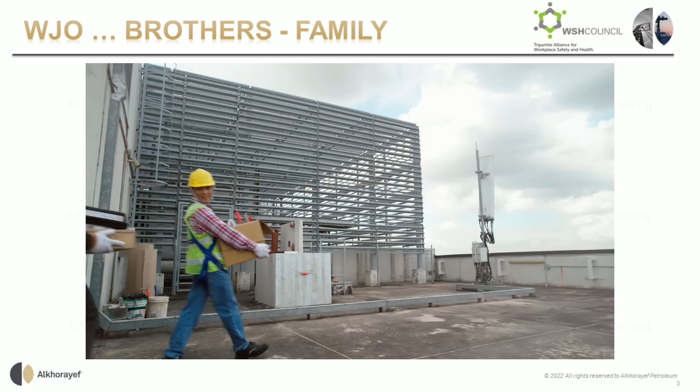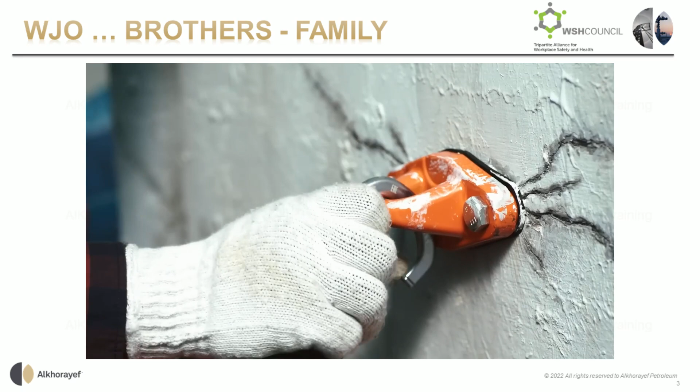Hey, wait. Must stay safe. Okay, thank you, Arun. Arun, look, go quick, I think not safe. Must report. Arun, everything ready? Can start. Okay, start work. Okay, done. Yong Wei, give me one tape. Arun, be careful. Where's your way? What happened? What happened to you?

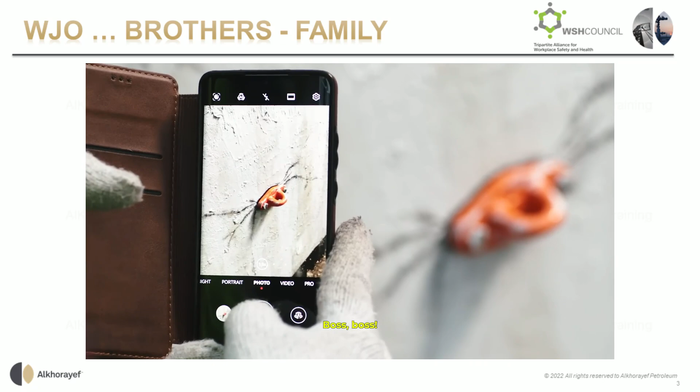Sorry, sorry. Arun, look, go quick, I think not safe. Must report. You're right, let's report. Boss, want to report a problem, sir? This one is not safe.

Here in Wafra, we all come from different backgrounds and cultures. However, all of us have one thing in common: we all left our homes and families to come and work in this place. We spend half, if not more, of our day working with each other. We are a family, brothers, but not in the traditional sense. Looking out for each other's back and taking care of each other is what makes us brothers.

Please make sure to always work safe and never cut corners. Please make sure to practice your stop work authority anytime you feel the need to do so. Never, under any circumstances, will the management or the supervisor blame you for reporting any unsafe act or condition. Always be cautious, always be safe.

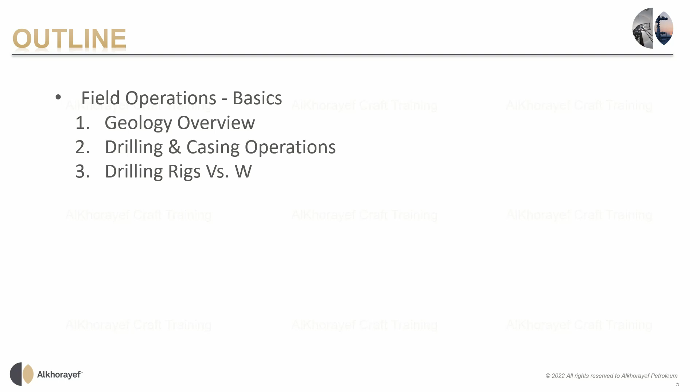Now let's start by going through the outline of this video. First, we will have a brief look about geology: what is it and why is it important? Second, we will look at drilling and casing operations. Third, we will look at the differences between drilling and workover onshore rigs. Fourth, we will have a brief look at the API standard, what it represents and why it is important. Lastly, we will go through the APC ESP standard operating procedure.

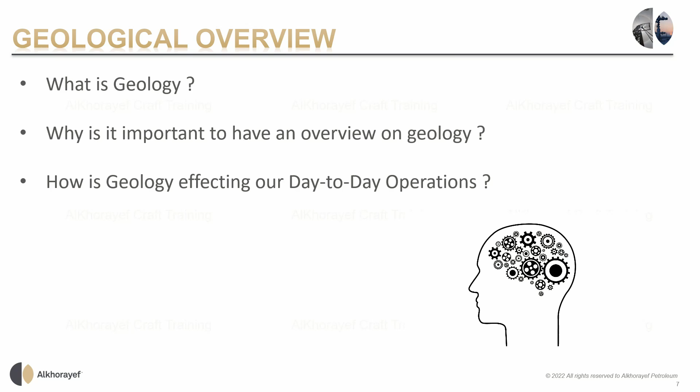In summary, geology is not just an academic subject. It is a practical tool that underpins our work in the oil and gas industry. By appreciating and applying geological knowledge, we can better manage the challenges and opportunities that come with each unique field.

However, beneath this challenging climate lies a blessing from God: reservoirs of hydrocarbons. These hydrocarbons, primarily oil and natural gas, are crucial for the development and progress of mankind. They power industries, fuel transportation, and play a vital role in the global economy.

Now let's talk briefly about hydrocarbons before we dive deeper into our subject. What are hydrocarbons? Hydrocarbons are organic compounds that contain only carbon and hydrogen atoms. They are the main components of fossil fuels such as petroleum, natural gas, and coal.

Hydrocarbons are classified into different types based on their chemical structure: alkanes or paraffins, saturated hydrocarbons with single bonds between carbon atoms, for example methane and ethane; alkenes or olefins, unsaturated hydrocarbons with one or more double bonds, for example ethylene and propylene; alkynes, unsaturated hydrocarbons with one or more triple bonds, for example acetylene; and aromatics, hydrocarbons containing one or more aromatic rings, for example benzene and toluene.

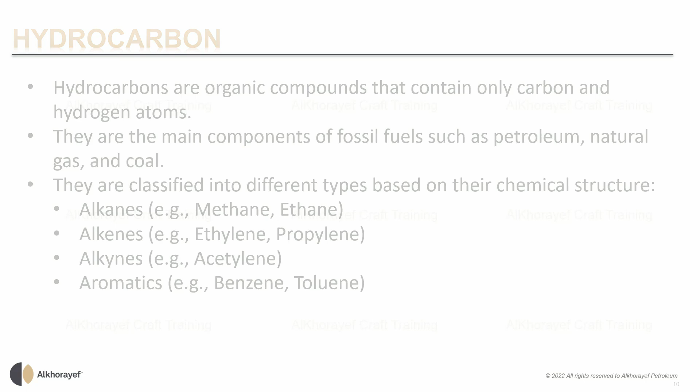Hydrocarbons are essential for modern society, providing a primary source of energy and serving as raw materials for a wide range of industrial products. Let us continue with our topic.

Understanding these properties is crucial for our operations. For instance, pressure is the force exerted by the weight of overlying rock layers and fluids within the pores. Porosity is the measure of void spaces in a material, which affects how much fluid a rock can hold. Permeability is the ability of a rock to transmit fluids through its pore spaces.

These properties significantly impact our extraction techniques and equipment choices. Recognizing the unique characteristics of each layer helps us optimize our operations and ensure the efficiency and safety of our activities. Now that we understand the properties of the various geological layers, let's delve into the specific types of rocks that play crucial roles in hydrocarbon formation and trapping.

By examining source rocks and cap rocks, we can better appreciate how oil and gas are generated and preserved in the subsurface. Source rock: source rocks are the geological formations where hydrocarbons originate.

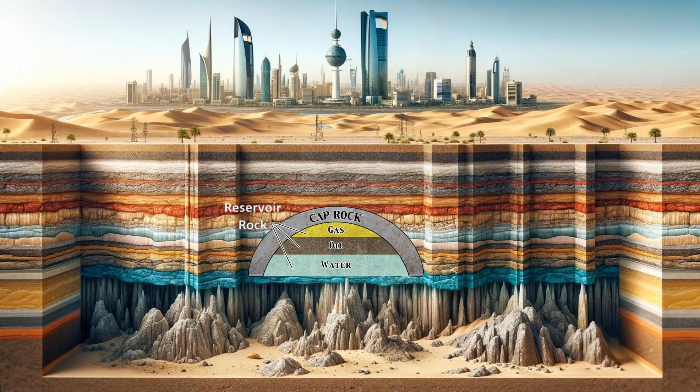Source rocks generate hydrocarbons, cap rocks trap them, and the resulting oil and gas are extracted to meet global energy demands. Each of these components must be carefully studied and managed to ensure successful and sustainable hydrocarbon production.

By examining this stratigraphic column, we can gain valuable insights into the geological history of the region, identify potential hydrocarbon reservoirs, and understand the structural features that influence fluid flow within these formations. This knowledge is crucial for effective exploration and production in the oil and gas industry, as it helps us make informed decisions about drilling locations, extraction techniques, and resource management.

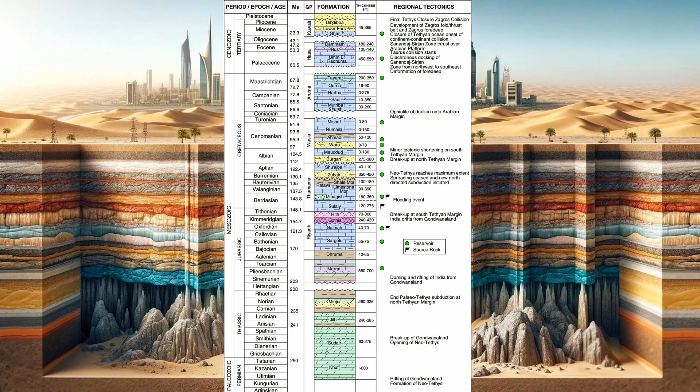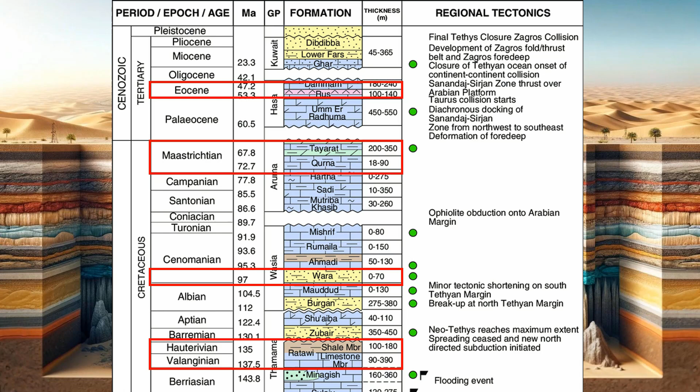Zooming in on Kuwait's stratigraphic column, we can see formations and reservoirs we are producing from here in our operations in Wafra, for example. We can see the Eocene Formation, mainly represented by letter S in our well operations. We can see the Maastrichtian Formation, represented by letter M. We can see the Wara Formation, represented by letter W. We can see the Ratawi Formation, represented by letter R.

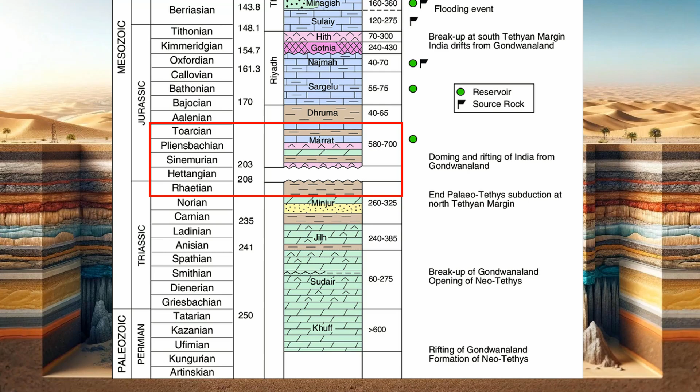These formations are integral to our production activities, and understanding their characteristics helps us optimize our extraction techniques and manage our resources efficiently. Furthermore, a question may be raised: how did geologists and scientists know about this stratigraphy? How did they determine the formation's petrophysical properties and mineralogy? All of this is done by taking a coring sample.

A coring sample, also known simply as a core, is a cylindrical piece of rock extracted from the subsurface during drilling operations. This sample is obtained using a specialized tool called a coring bit, which is attached to the drill string. The core is typically taken from the reservoir rock or other geological formations of interest.

This core sample is used to understand reservoir characterization, petrophysical properties, mineralogy, geological and structural analysis, stratigraphy, structural features, fluid analysis, hydrocarbon content, fluid properties, economic evaluation, resource estimation, and more.

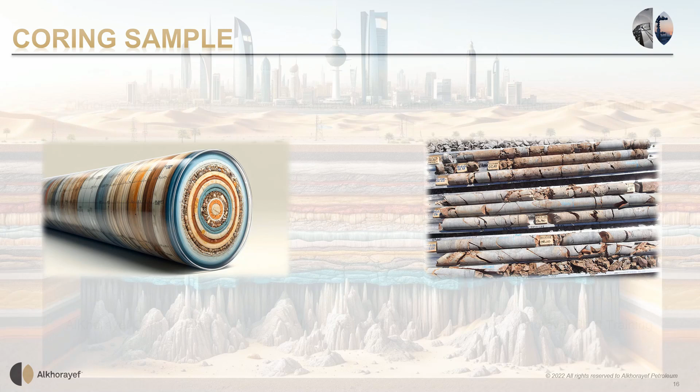By providing a direct and tangible sample of the subsurface rock formations, coring samples play a vital role in the exploration, evaluation, and production of oil and gas resources. They enable more precise and informed decision-making, leading to better management and optimization of hydrocarbon reservoirs.

Now let us move on and explore the drilling operations.

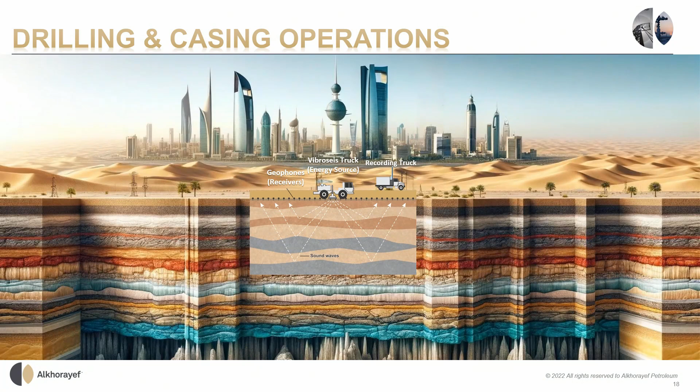After a seismic reflection survey, which is a specialized job that uses non-invasive geophysical techniques, geoscientists can image geological features and structures throughout the whole thickness of the crust. In a simple form, this survey provides an indication of whether hydrocarbons might be present in a particular location.

After the seismic data is interpreted, the reservoir engineer, along with the geologist, evaluates the potential for hydrocarbon presence in the surveyed area. They analyze the seismic reflections to identify possible reservoirs, determine their extent, and assess the likelihood of hydrocarbon accumulation. Based on the depth of the reservoir, its location, geometrical complexities, and the depth that needs to be drilled, a drilling program is created by the drilling engineer.

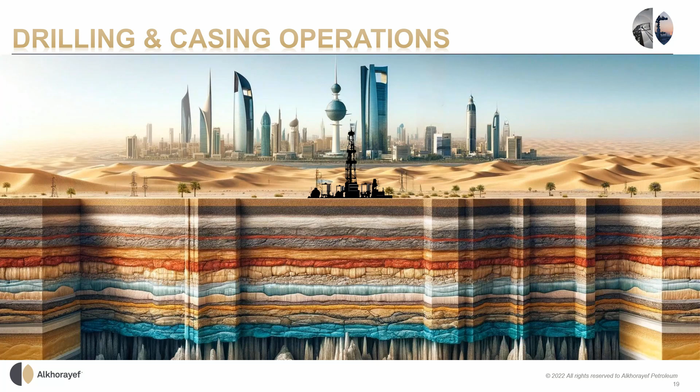A drilling rig then moves to the location and begins the drilling operation. While well drilling might seem as simple as removing dirt from the ground until reaching the desired depth, it is in reality more about constructing a well rather than merely drilling a hole. This involves careful planning, casing, cementing, and installing various equipment to ensure the well's integrity, safety, and efficiency.

After drilling the first section, a casing is installed and cemented to the annulus of the well to isolate the formation from the next section.

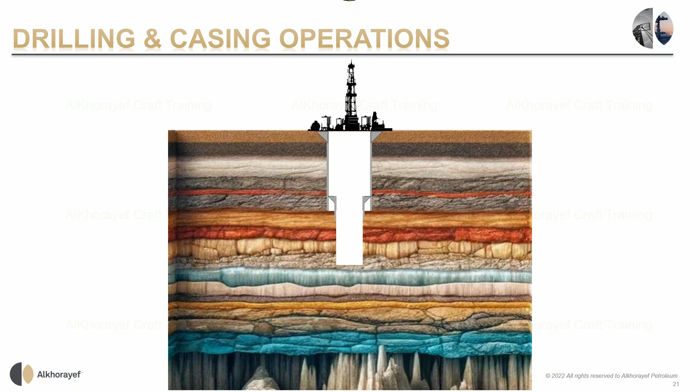The process continues to drill to the next predetermined casing point, which is called intermediate casing. This is generally done to isolate unstable hole sections, isolate under-pressured zones to prevent loss of circulation, isolate over-pressured zones to prevent well kick, and isolate multiple production zones.

Continue the process to drill to the total depth, TD. Once the final intermediate casing string is run and cemented, the drilling process is continued until the well reaches the TD of the well. After that, the production casing or liner is run and cemented.

After running and cementing the production casing or liner, a perforation job is conducted on the production casing. Perforation involves running a perforation gun into the wellbore until it reaches the desired production depth. Once in position, the perforation gun is fired to create openings in the casing, allowing reservoir fluids to flow into the casing.

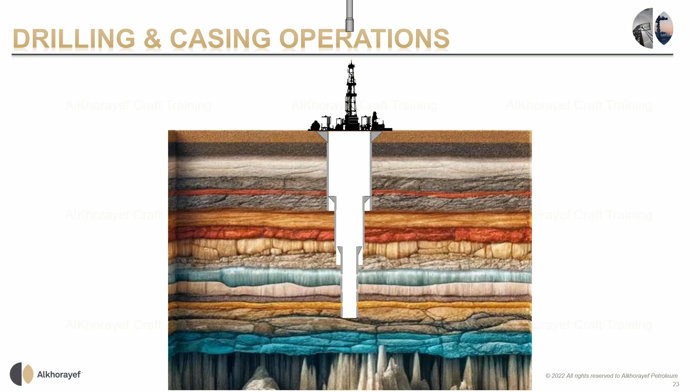After perforation, production tubing is installed in the well. Following this, a series of valves and equipment, known as a Christmas tree, is installed on top of the well. The Christmas tree controls the flow of formation fluids. In wells where the formation fluid flows naturally to the surface, this setup is referred to as a natural flow well.

However, if the flow of the fluid is not sufficient to reach the surface naturally, the well requires additional means to assist the fluid in reaching the surface. In the oil and gas industry, this process is known as artificial lift.

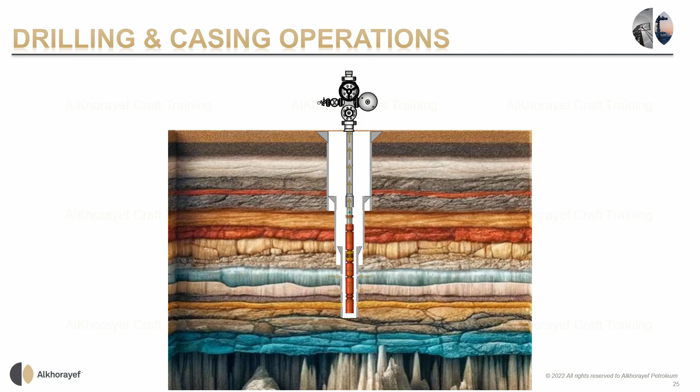One of the most widely used artificial lift methods is the electrical submersible pump, ESP. An ESP is a technology installed in the well to help increase the lift of the fluid, enabling it to reach the surface. The ESP system consists of a multi-stage centrifugal pump that is submerged in the wellbore. It is powered by an electric motor, which drives the pump to lift the fluid from the reservoir to the surface.

The key components of an ESP system include: the pump, a multi-stage centrifugal pump designed to handle large volumes of fluid; the motor, an electric motor that drives the pump, typically located below the pump in the well; the seal section, which protects the motor from well fluids and provides a pressure equalization system; the power cable, which transmits electrical power from the surface to the motor; and surface controls, including transformers, switchboards, and variable speed drives to control the ESP's operation.

ESPs are particularly effective in wells with high production rates and can handle a variety of fluids including oil, water, and gas. They are known for their efficiency and ability to operate in harsh, downhole environments. By installing an ESP, operators can significantly enhance the production capabilities of a well, ensuring a steady and reliable flow of hydrocarbons to the surface.

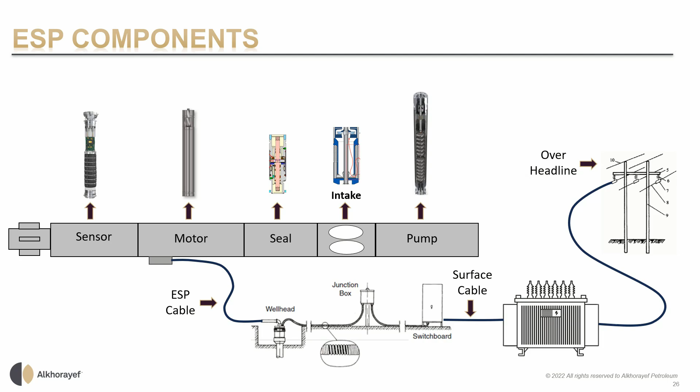Now let's proceed to examine the drilling operations.

In the oil and gas industry, there are both onshore and offshore rigs. Since we operate exclusively in Wafra, let's focus on onshore rigs. Onshore rigs can be categorized into two different types.

Drilling rigs are used to drill new wells. The main tasks involved include drilling the well, installing casing to stabilize the wellbore, cementing the casing to secure it in place, and completing the well to prepare it for production. Drilling rigs are designed to handle substantial stresses and the complexities of drilling operations.

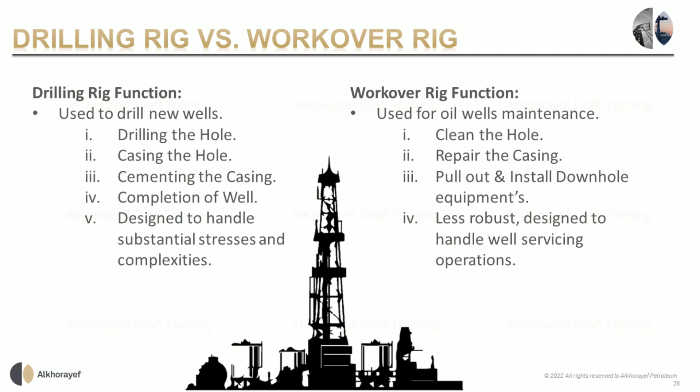Workover rigs are used for well maintenance and servicing. Their main tasks include cleaning the wellbore to remove debris and obstructions, repairing or replacing damaged casing, and pulling out and installing downhole equipment such as pumps and tubing. Workover rigs are less robust than drilling rigs and are specifically designed to handle well servicing operations.

We will focus on workover rigs for now since drilling rigs are not within the scope of our work. A workover rig contains the following main components: mast or derrick, drawworks, power system, pump, rotary table or top drive, pipe tubing handling system, blowout preventer (BOP), mud system, cranes, and catwalk.

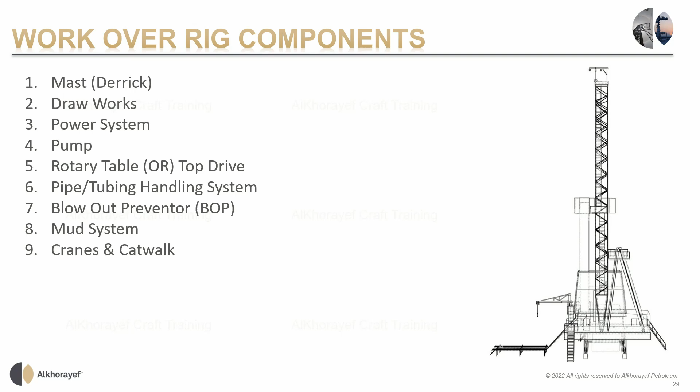The mast, also known as the derrick, is a tall vertical structure that provides the necessary height to handle long lengths of pipe and tubing. It supports the weight of the drill string and other downhole equipment, facilitating the raising and lowering of pipes, tubing, and tools into and out of the wellbore.

Masts are typically designed to be collapsible or foldable for easier transportation and setup at different well sites. They are constructed from high-strength steel to withstand substantial loads and operational stresses.

The top of the mast houses the crown block, a fixed assembly of pulleys, while the traveling block moves up and down within the mast. This system, in conjunction with the drawworks, provides the mechanical advantage needed to lift heavy equipment.

The base of the mast, known as the rig floor, is where operations are conducted. It includes the rotary table or top drive, and is the central point for pipe handling. The mast is equipped with various safety features, such as guy wires or supports, to ensure stability during operations, especially under high wind conditions or heavy loads.

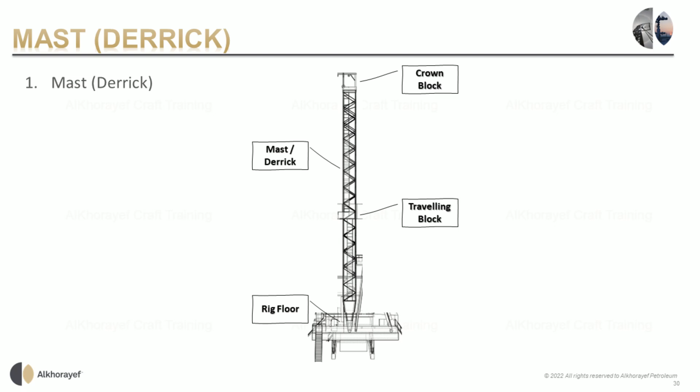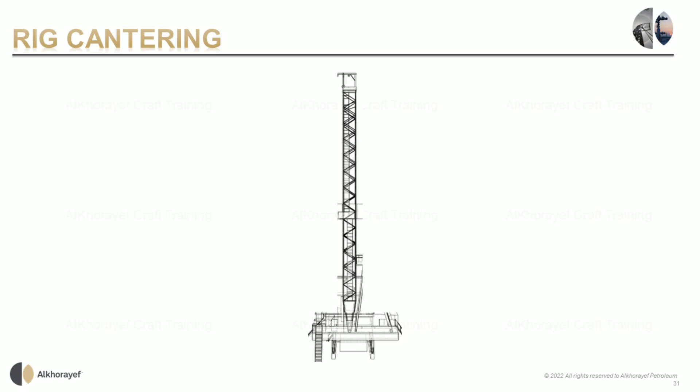Rig centering is a crucial aspect of the installation process for electrical submersible pump (ESP) equipment. Proper centering ensures that the entire operation runs smoothly, efficiently, and safely, preventing potential damages to the equipment and enhancing the overall performance of the ESP system.

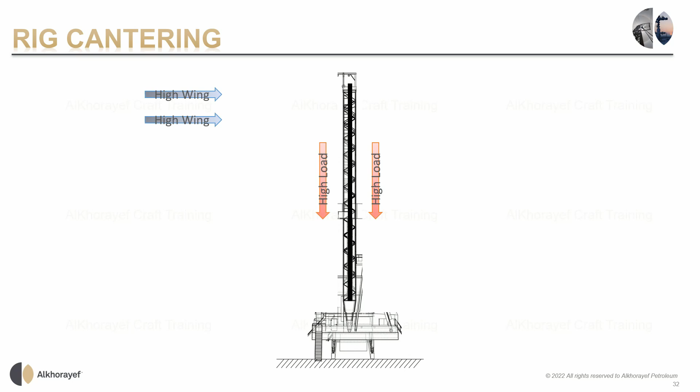There are many factors that contribute to rig cantering: uneven ground surface, soil stability, the load of the equipment and tubing increasing with higher depths, and environmental factors such as strong wind, heavy rain, or seismic activity.

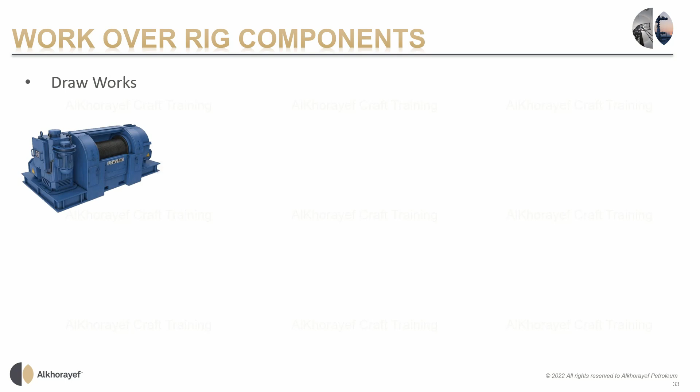Now that we have thoroughly discussed the importance of the mast in a workover rig, let us shift our focus to the other crucial components that enable the efficient operation and maintenance of oil and gas wells. Each of these components plays a vital role in ensuring the overall functionality and safety of the rig during various workover operations.

The drawworks is the hoisting mechanism of the rig, consisting of a drum, brakes, and a power source. It is responsible for raising and lowering the drilling or servicing equipment into and out of the wellbore. The drawworks provides the necessary mechanical advantage to handle the heavy loads encountered during well operations, making it a critical component for the smooth functioning of the rig.

The power system typically includes diesel engines or electric motors that generate the energy required for all rig operations. This system powers the drawworks, pumps, and other essential equipment, ensuring that the rig can perform its tasks effectively. Reliable power systems are essential for maintaining consistent operational performance and minimizing downtime.

The pump is used to circulate fluids within the wellbore during cleaning, repair, or completion operations. It plays a crucial role in maintaining well control, removing debris, and ensuring the proper placement of cement or other materials. Pumps are designed to handle various types of fluids and operate under different pressure conditions, making them versatile tools in workover operations.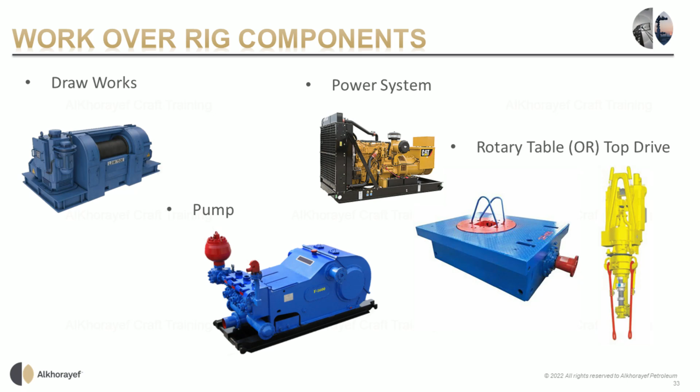The rotary table or top drive is responsible for rotating the drill string or tubing, facilitating various downhole operations. The rotary table is a fixed piece of equipment located on the rig floor, while the top drive is a mobile unit that can move along the derrick. Both systems provide the necessary rotational force to drill, ream, or perform other mechanical tasks within the wellbore.

The pipe tubing handling system includes elevators, tongs, and slips used to handle and manipulate the pipe, tubing, and other downhole tools. It ensures the safe and efficient movement of these components during installation, removal, or maintenance operations. Proper handling systems are essential for minimizing damage to equipment and ensuring the safety of personnel.

The blowout preventer (BOP) is a critical safety device installed on the wellhead to prevent the uncontrolled release of well fluids. It can seal off the wellbore in case of a blowout, protecting both the rig crew and the environment.

BOPs are equipped with multiple rams and annular preventers to provide a robust barrier against high-pressure formations. The mud system comprises tanks, pumps, and mixing equipment used to prepare and circulate drilling fluids, mud, during operations. These fluids help control wellbore pressure, stabilize the formation, and remove cuttings from the well. A well-maintained mud system is essential for maintaining well control and ensuring efficient drilling and completion processes.

The catwalk is a structural platform that serves as a staging area for pipe and other equipment before they are lifted into the rig. The catwalk is typically located at ground level and runs parallel to the rig floor. It plays a crucial role in the safe and efficient handling of tubulars and other tools used in well operations.

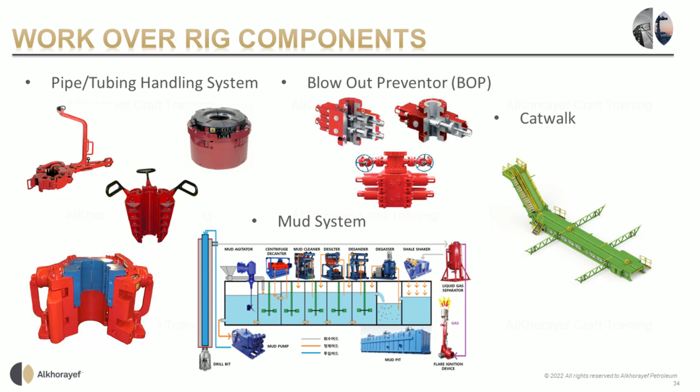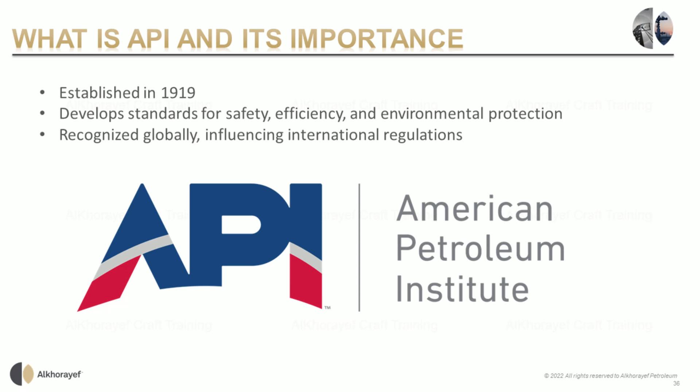Now let's move forward to explore the API standards and their significance in the oil and gas industry. The American Petroleum Institute, API, established in 1919, plays a crucial role in the oil and gas industry by developing standards that ensure operational safety, efficiency, and environmental protection. These standards are globally recognized and widely adopted, influencing international regulations and promoting best practices across the industry. By adhering to API standards, companies can enhance their operational reliability and minimize environmental impact, making API a cornerstone of industry excellence.

API standards cover crucial areas in the oil and gas industry, including drilling, production, refining, pipelines, and health, safety, and environment, HSE. In workover operations, API standards ensure the reliability and safety of critical components like electrical submersible pumps, ESPs, and production tubing and casings. For example, API Spec 5CT specifies the requirements for casing and tubing, essential for maintaining well integrity during production.

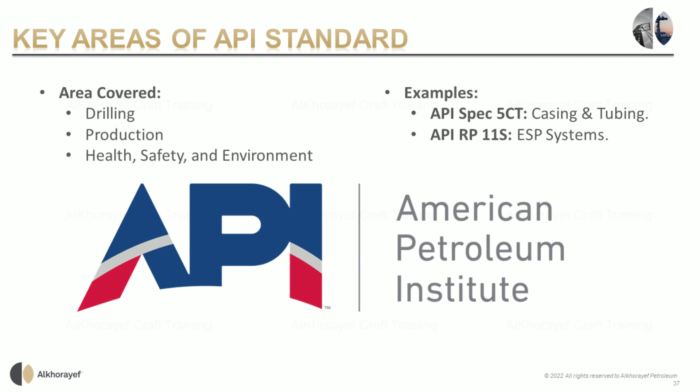API RP 11S provides guidelines for the design, installation, and operation of ESP systems, ensuring their efficient and safe performance. Additionally, API Spec 11AX outlines the specifications for subsurface sucker rod pumps and fittings, which are critical for various artificial lift methods, including ESPs. By adhering to these standards, operators can enhance the performance and longevity of well components, ensuring safe and efficient production.

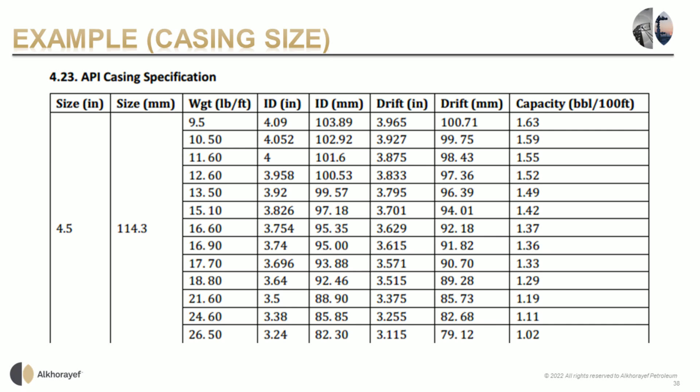Now let us take the casing, for example. The inner diameter, ID, the outer diameter, OD, the drift, and the weight of the casing is all standardized using the API standard. This is important to provide guidelines and best practices that help prevent accidents and protect workers, equipment, and the environment.

Lastly, Al Khorayef Petroleum Company has created and implemented its own standards and procedures for handling all equipment and tools within their work scope. These standards and procedures are aligned with API standards to ensure that the quality of the equipment meets international benchmarks. All of this is done by implementing a quality management system, QMS.

QMS is essential for maintaining consistent quality across all our processes. It ensures that we deliver reliable and high-standard products and services every time. It provides a structured framework for documenting and reporting our procedures, which is crucial for transparency and accountability in our operations. And by adhering to industry standards such as ISO and API, a QMS enhances our credibility and ensures we meet all regulatory requirements.

A QMS also plays a significant role in enhancing customer satisfaction and loyalty. By consistently meeting or exceeding customer expectations, we build trust and long-term relationships with our clients. Furthermore, a QMS helps identify and eliminate inefficiencies in our processes. This reduces waste and operational costs, leading to more efficient operations.

It also promotes a culture of continuous improvement. By regularly updating our processes based on performance data and feedback, we can continuously enhance our operations. Lastly, a QMS is crucial for risk identification. It helps us identify potential risks and implement measures to mitigate them, ensuring smoother and safer operations. In summary, a quality management system is vital for ensuring quality, compliance, efficiency, continuous improvement, and risk management in our operations.

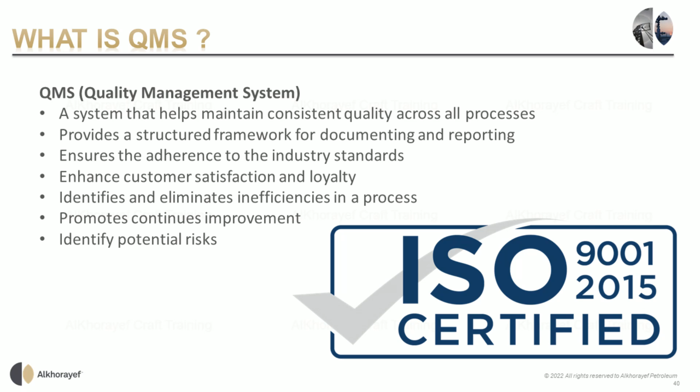Let us quickly go through the QMS documents index used by Al Khorayef Petroleum Company in their joint operations project in Wafra. This document index covers the project quality plan, inspection and test plan, and all the standard operating procedures and work instructions related to processes done within APC WJO ESP work scope.

Here we can see the SOPs and WIs related directly to the downhole department: Procedure for ESP operations. Procedure for inspection and testing of ESP cable. Procedure for ESP cable splicing. Procedure for ESP handling and downhole assembly. Procedure for ESP run-in hole. Procedure for pull out of hole and lay down.

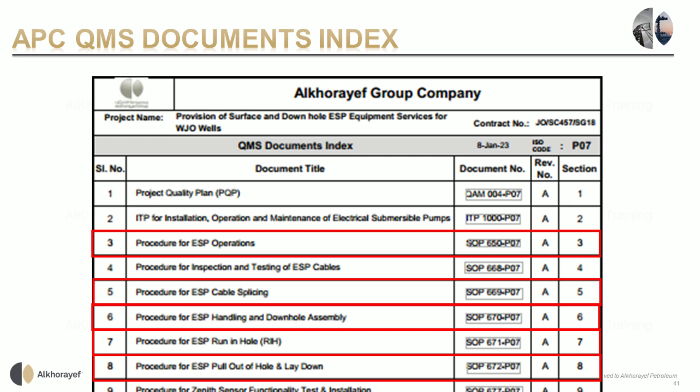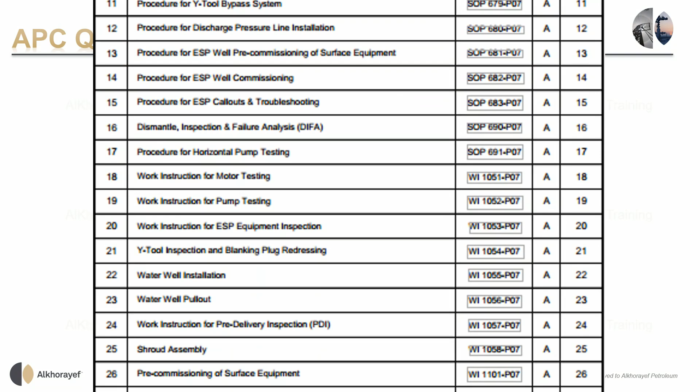Procedure for Y-tool bypass system. Procedure for discharge pressure line installation. And work instruction for Y-tool inspection and blanking plug redressing. Work instruction for water well installation. Work instruction for water well pullout. Work instruction for shroud assembly.

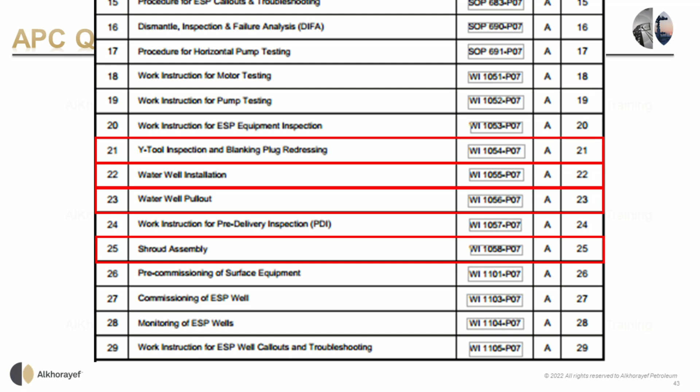APC QMS documents can be found in Wafra Workshop Training Room as a hard copy. Requesting soft copies from the QA/QC or your supervisor, by accessing Downhole Department SharePoint under the Quality Hub section.